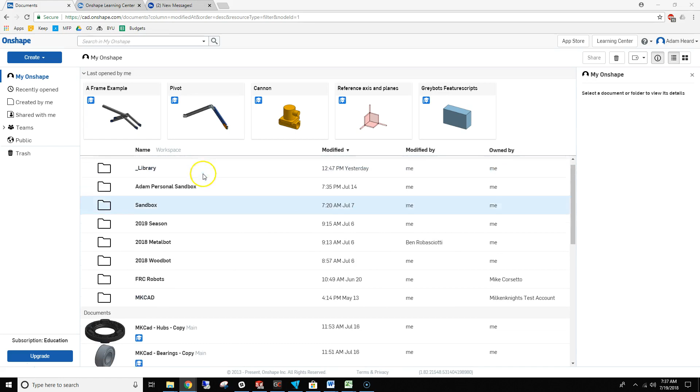So the first is really just the whole concept of it. It's cloud-based, so you log into a browser and use it. You're not tied to a computer. There's no versions to install or manage. There is no 2015 Onshape versus 2018 Onshape, and that is really nice. It used to be a combination of a fair amount of work and quite a bit of a barrier to entry to maintain multiple different versions of the software and update over the years.

And it'd be tough for me personally because I often would have to have 2 different years of SolidWorks installed for business, and then sometimes it'd even be a third year for educational. Then if I accidentally reviewed and saved the robot with the business version, I'd think oh crap, I have to undo that commit because now the students can't open it, and so on and so on. And then there'd be that dead period sometimes where the student's SolidWorks license had expired, but we hadn't quite gotten the new one.

I still love SolidWorks and I'm going to keep using it for business, but for the team, Onshape is super sweet. So yeah, not having to install that stuff saves a lot of time, big headache, really shaves off the barrier to entry for the kids.

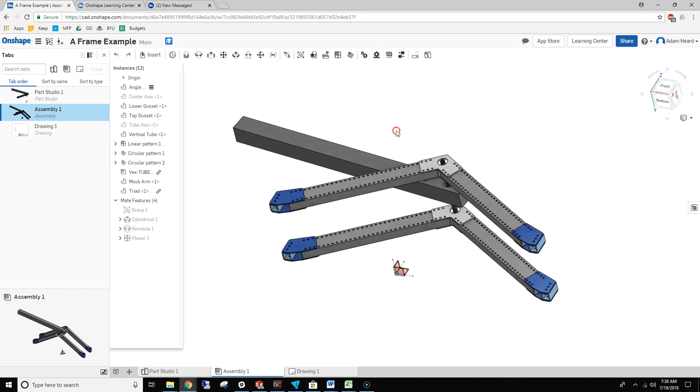I was surprised personally with how fast it is. So this isn't the biggest assembly here, but it's one right in front of me. You see it takes a moment to load, not much different than SolidWorks. But once you're in here, you can just rotate and work around in this, and same with sketches, they're fairly quick. And it's kind of amazing because this is happening out on the internet somewhere, and it's just so quick.

And if you don't believe me, what I recommend you at least do from watching this video is make an account, download the mobile app, and you should be able to find 319's robot just by searching 319 in the public section and browse it on mobile. I think you'll be blown away with how well it works on mobile and how much you can do. You can actually model on mobile, but even if you don't model on mobile, you can just rotate things, view things, take a screenshot, circle, and use that as a design review. I know Mike Corsetto's been doing that with GrabCAD mobile over the years, and that's been really effective for him, so we're both excited to be able to do that, even more so with Onshape.

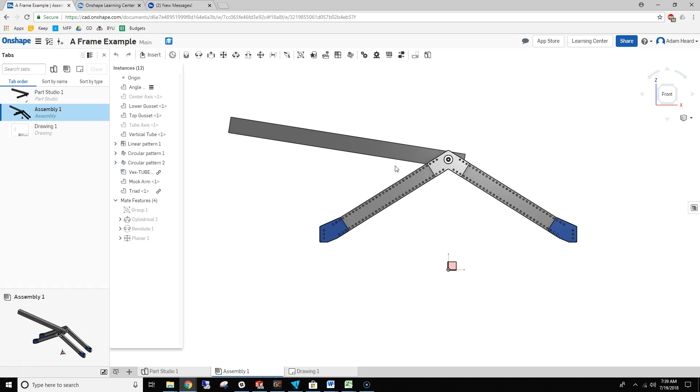Kind of hand in hand with that is all of the file management is here in the browser, just like Google Drive. There is no PDM - we used to use SVN a while ago, GrabCAD, Dropbox, Google Drive, a flash drive you're passing around. Everything is instantly shared, accessible.

You're not worried about as many issues where 2 students are working on the same assembly and they have to coordinate, or they didn't coordinate and they both commit, and now you have to decide well you both did good work, but only one of these files can go in, so who has to rework and who has to toss? They can both be in the same part and editing at the same time. Now that doesn't scale super well - you can't have 15 people in the same part studio, it gets really cumbersome.

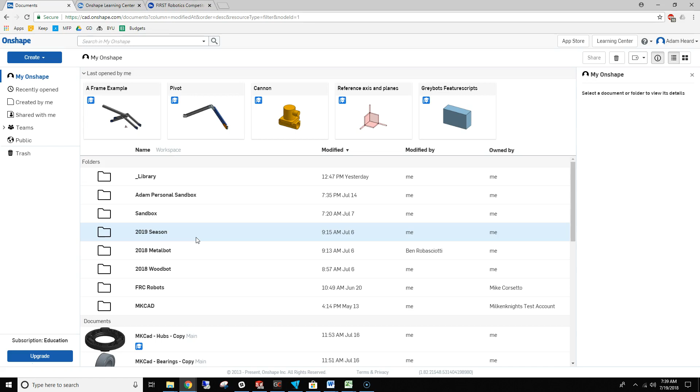But if you have good abstraction - let's say this was a robot, we'd have the drivetrain be one part studio, we'd have this assembly be one - a similar abstraction you would want to do with assemblies in a CAD program anyway. Then you have 2 or 3 people working in each one, not that big of a deal.

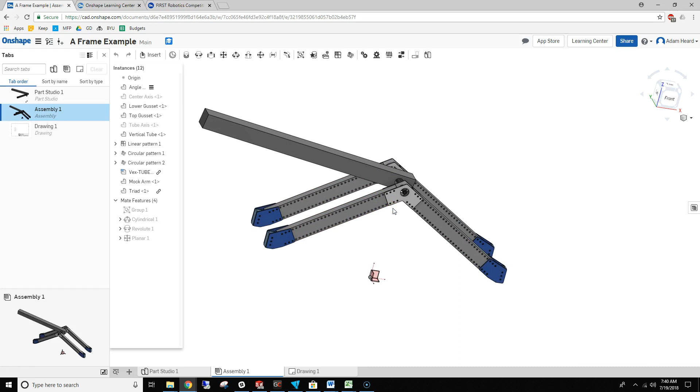So I will say when you're opening something big on a device you haven't opened before, there is an initial delay, and it might convince you when you're first checking out Onshape that it's slow. But what that's analogous to is that first GrabCAD download or first PDM checkout where you have to bring those files local.

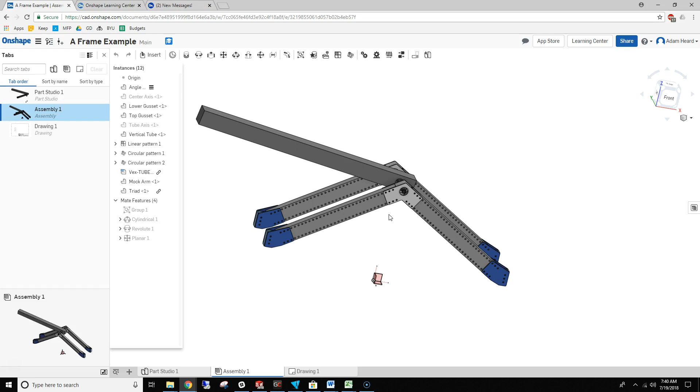So I will say after using it for a bit, that the amount of time it takes to open up and work on something is definitely comparable to using SolidWorks with version control. So I don't think it's any slower.

From there, I found some good stuff on YouTube. Their forums are pretty good when you have questions. But I just love that this is all integrated. What I'd really love, and I asked for this as a feature, is if I as like an admin or something could see my students' progress on their accounts on these, but they don't have that yet, unfortunately.

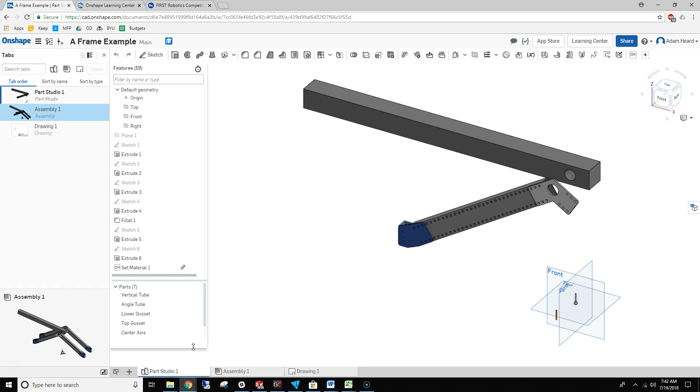All right, so now let's start working on some stuff. So for a couple years now, we've done multi-body parts in SolidWorks, which is where you have one part file, but there'll actually be multiple bodies, not attached in there, that actually represent separate physical parts. And we do that to pass dimensions around easier. And you just have everything edited in one spot, and then you make an assembly from there.

Well, since that wasn't the SolidWorks primary workflow, a lot of things get complicated about that, because unless you split those multiple bodies into actual separate SolidWorks parts, a lot of if you do use bill of materials and part properties and stuff to populate drawings, a lot of that metadata is assigned to all of the bodies together, not the singular bodies. It's kind of a pain.

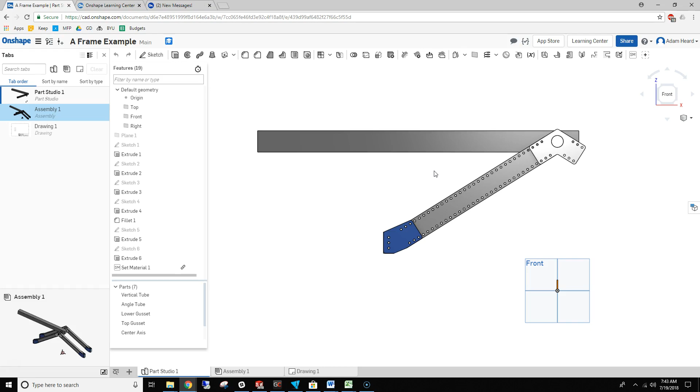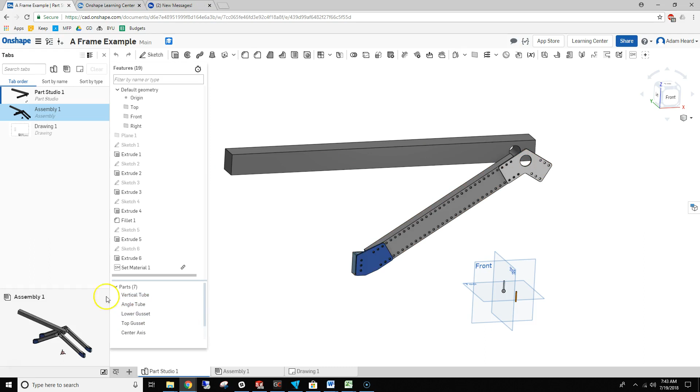Well, Onshape has embraced that multi-body workflow as the primary thing. So all of their feature sets and everything they're going to add going forward is built around the fact that I'm in a part studio, which is not really a part, not really an assembly. It's a collection of bodies where you can do all this modeling, and you have your classic feature tree here, and then you get your unique bodies, and you can assign your properties and stuff to them here, if you want to fill out any of these things. And then it supports that fairly cleanly.

And then from there, you can make an assembly from that. What's cool is for things that do not have a lot of symmetry, that would be fully modeled at this part studio, you can just jump to the assembly and not have to remake everything because you already modeled it in place, which can be a big time saving.

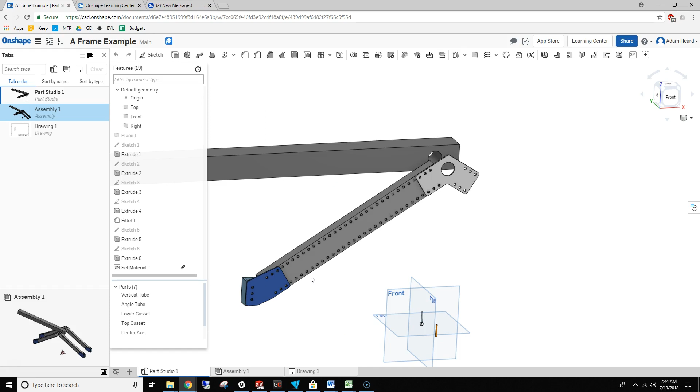Unfortunately, since Onshape is still a work in progress, they're missing some features, primarily assembly planes, assembly mirrors, in my mind. Those are the biggest ones affecting our workflow. And there's some hacks to fix that I'll show you a little bit in this video and a little bit in a separate video about how I made this A-frame. But you can work around that. What next?

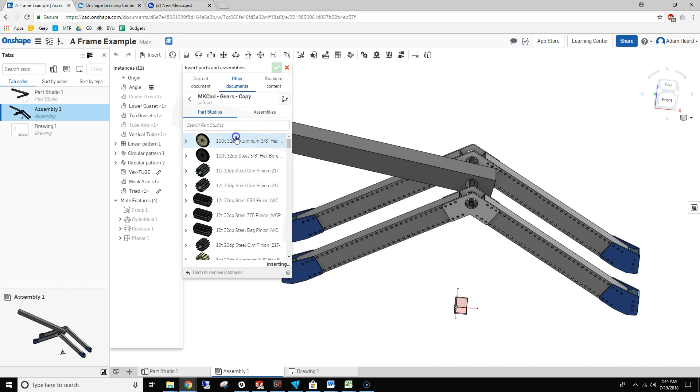So let's look at that MKCad library real quick. It's pretty easy: if you want to insert something, come in here and search MKCAD, pick whatever it is you want to add. It looks like people have been making copies of some of this stuff, but whatever, it'll work. Pick that item, drop it in. They've done a good job of getting just about every off-the-shelf part I think you can.

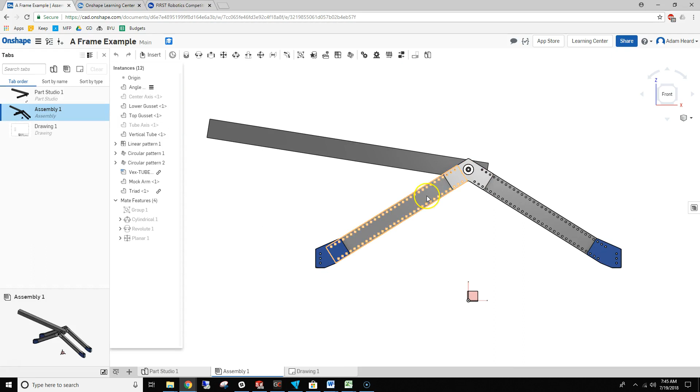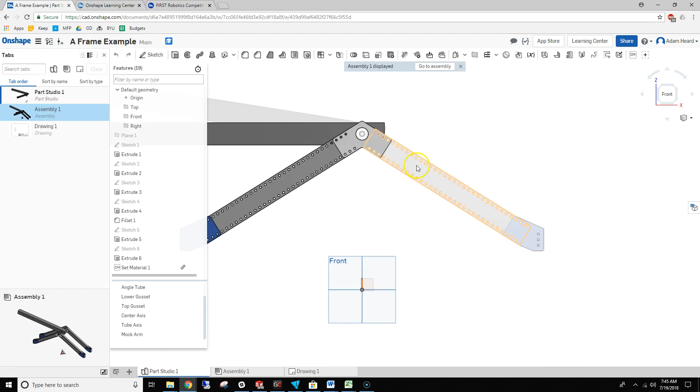Including those new parts I added that didn't even move, in here that I can reference in my sketch geometry and make new parts. Then I can save this as a snapshot with a name and come back to editing in this context. That tutorial does teach it well. Then I can move the arm to a different angle and do the same thing.

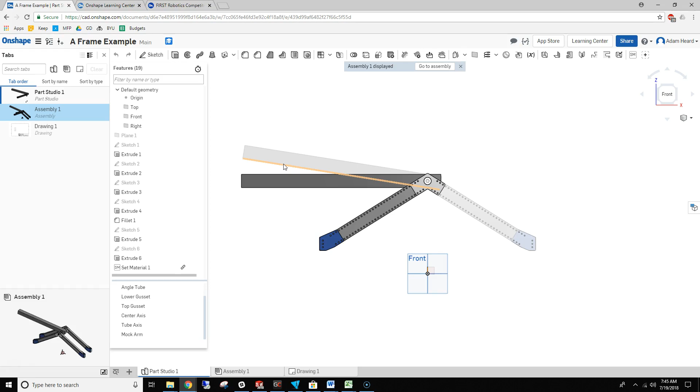What I really like is those tools did exist in other programs, but I don't think they were packaged well enough to make them really intuitive and easy to understand for kids. So this is nice. I think it's in the realm that students who are just learning can do this and not introduce a lot of risk to your modeling.

All right, so let's talk a little about some of the things that are missing that are fixable. You've got to register that educational account like we talked about.

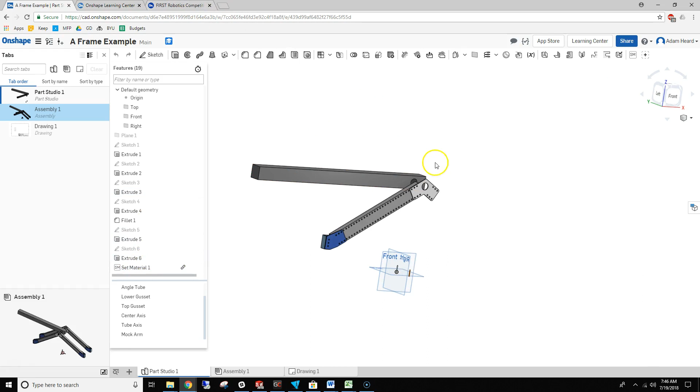The next thing that's missing is there's actually no override mass properties feature, which I'm sure they'll add at some point. In the interim, someone has made this little tool, and I'll make another video about how you import all this, where you bring it in the feature, select the body you want, select the weight you want, and it fakes it out for you. Then you do end up with a body at that mass, so it's just as functional.

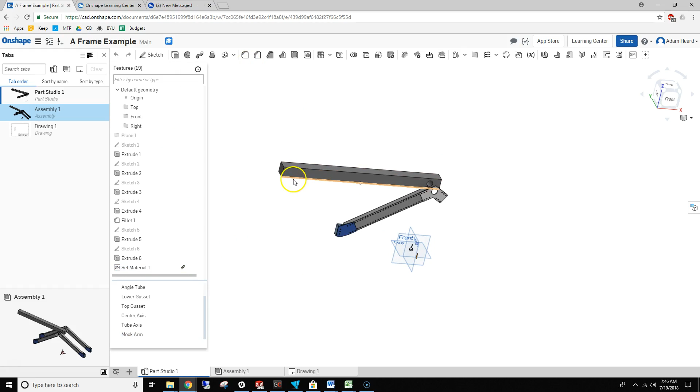The other thing that's missing is assembly planes and reference geometry and mirrors, like we talked about. In this A-frame video, you'll see some of what I did by adding these location-specific reference axes to do that revolve.

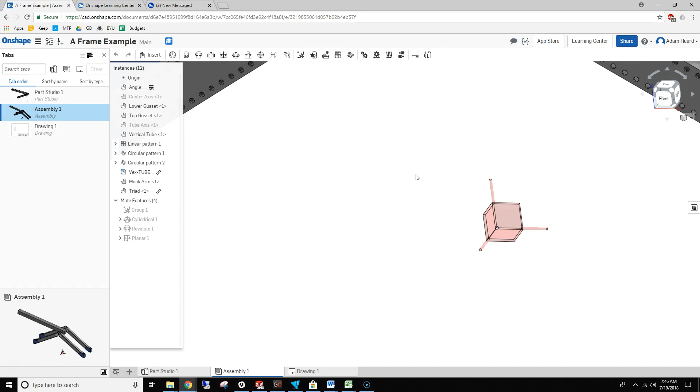Since then, I've also made this little triad part that has no mass, it's clear, its properties are overridden, so it won't show up on any bill of materials. This just gives me the primary axes and the primary planes at an assembly if there's any reason we would want to do that.

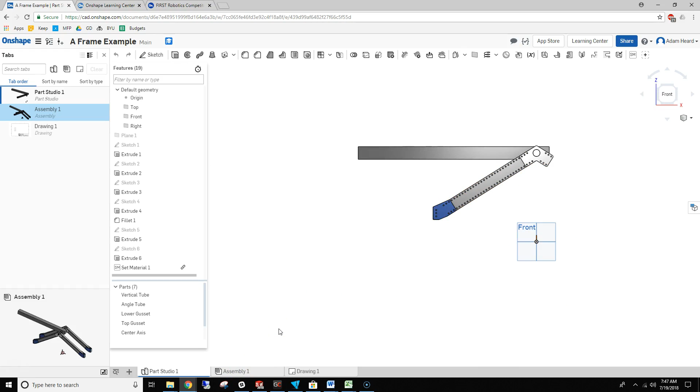I think for a lot of stuff in Onshape, since you're setting so much positioning in the part studio and presumably drawing it in an orientation you're happy with, and then you're going to take that whole assembly and mate it with some other assembly, you won't need to do this, but there's a couple spots where it would come in handy. I'll do another video maybe on how to use that exactly.

So that's kind of where we're at with Onshape. We're both really happy with it. Closer to season, I think I'll do another video updating with what the proposed workflow for our team will be, kind of the file structure, what level of abstraction we'll do in terms of independent part studios, independent documents, assemblies, that sort of thing.

Mike and I are feeling pretty good about it, and both of our teams run fairly big involved CAD processes, using bills of materials, feeding into a part number system, making really large numbers of parts with our routers. If you look at our robots, we have so many gussets everywhere that are unique just because the router doesn't care if it's making 10 of the same gusset or 10 unique gussets.

So if we can make it work for us, I'm really confident it'll work for your team, and I encourage you guys to check it out, and hopefully it'll make it a lot easier for those newer students to get involved in CAD for you guys.